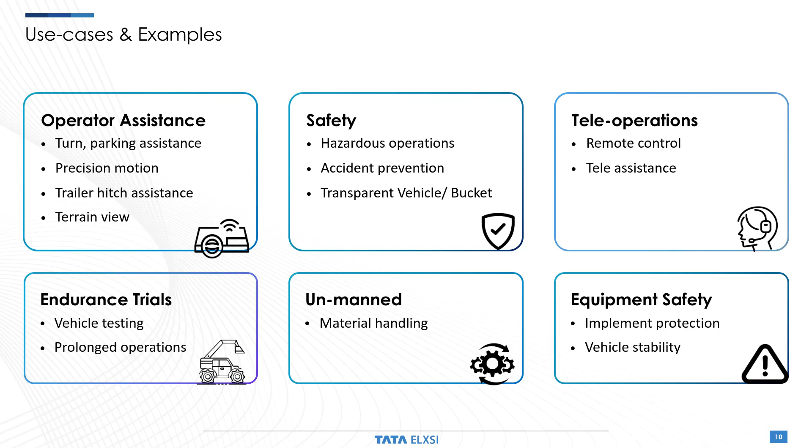Coming to the safety side, it can include hazardous operation handling, accident prevention, and transparent vehicle/bucket solutions. On the teleoperation side, it can be purely remote control for handling remote hazard operations, or tele-assistance for autonomous operation. Considering endurance trials, given driver availability constraints, automation helps run trials for 24 to 48 hours in unmanned operations. For equipment safety, solutions can address implement protection or vehicle stability.

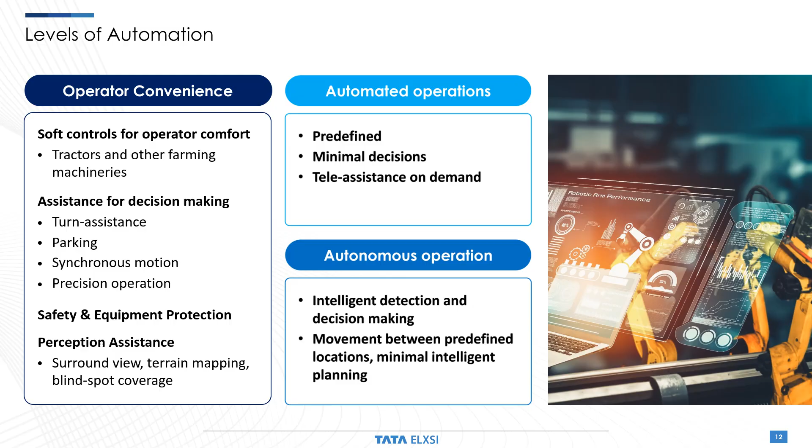Then there can be different levels of automation, starting from operator convenience to semi-automated operations, where you have partial automation implemented, to fully autonomous operations. We'll be discussing more into these different use cases in the upcoming slides.

These operator assistance solutions, the challenges associated with them can be categorized into two aspects. One aspect is the use case itself — some use cases are complex, and solving and developing algorithms for such use cases is one pillar. The other is the complexity associated with developing use cases in the development process, since hybrid algorithms are being used, which is another factor.

Let us discuss the solution challenges. When you consider the solutions, there will be diversities in the use cases, especially in the off-road segment. Comparing to the automotive segment, the off-road segment will have a lot of diversities in use cases, and that adds to the complexities. There may be requirements for precision maneuvering and extended perception, much beyond the vehicle in elevation and azimuth, and all-weather operations. Such things add complexity to the use case.

Localization and motion tracking is a huge challenge in the off-road segment, especially in unstructured environments. The dependency on multiple sensors would be required for localization and motion tracking. When coming to sensor technology, a lot of processing is required when using lidar sensors to handle degraded vision situations, and cost is also involved with the different sensors. Then the powering requirement is a challenge, especially to handle automation requirements, powering the actuators and other devices — power management is an issue.

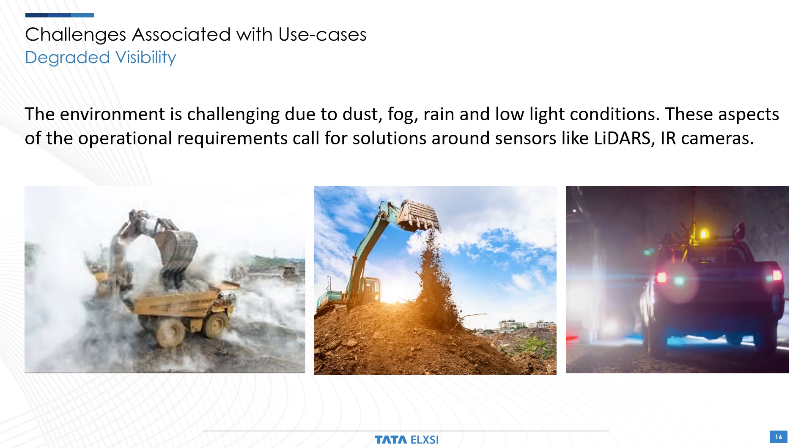Another challenge is the weather impact. Due to weather conditions, whatever sensors we are using should be rugged enough to handle that. It might require specialized rugged enclosures and a special cleaning mechanism to deploy in the field.

Another important challenge is the complexity associated with mapping and localization of unstructured environments. In most cases, since the environment is highly dynamic, it is very difficult to even represent the boundary of the drivable region. In some cases, uneven terrain and complex vehicle orientations have to be considered to develop the algorithms.

Especially for vehicles operating in mining sites and remote construction sites, the GPS signal is mostly poor. The GPS satellite signals are corrupted by data noise, multipath errors, clock errors, or atmospheric delays — that brings complexity to the localization process. Then there are errors in the odometer sensors due to wheel slip and such. All this frequently changing dynamic environment demands frequent map updates — that is the issue.

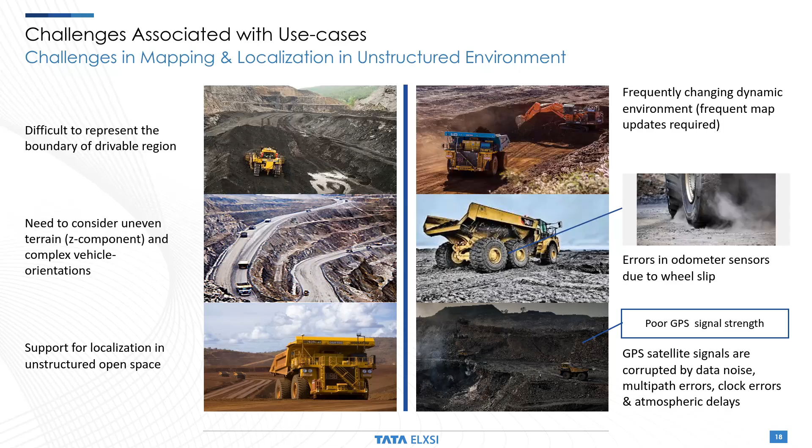Coming to the extended reach of off-road machinery like excavators and cranes, you can see it has extended reach in azimuth and elevation aspects. That adds to the complexity of the sensors, because multiple sensors would be required to address the field of view coverage, which adds to the complexity of processing as well as sensor cost and deployment.

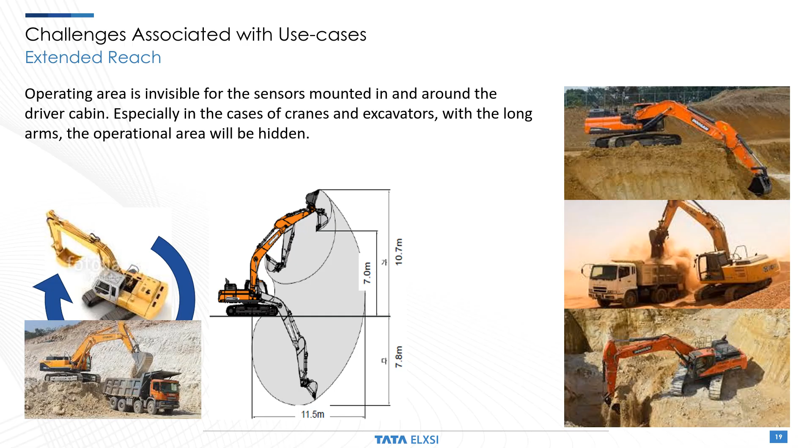As Rajesh mentioned, multiple sensors are most of the time required. Another important thing is the sensors on moving parts. You can see in the diagram, it's an excavator, and we all know its mode of operation. This vehicle has multiple moving parts.

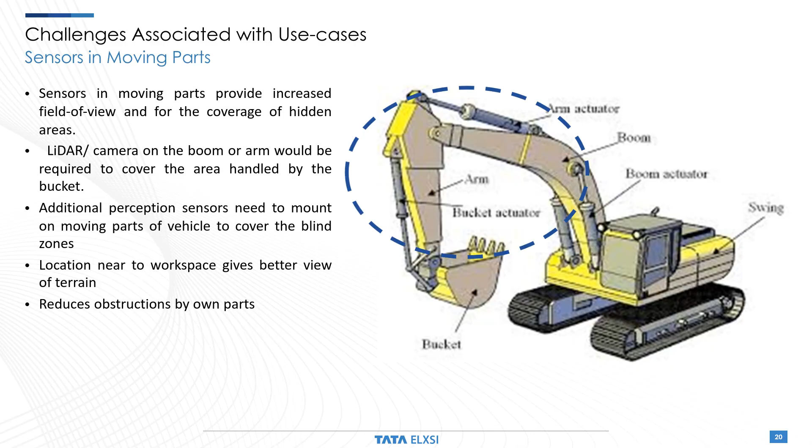The bucket, arm, and boom of the excavator are in continuous motion. In some cases we're forced to deploy sensors attached to these multiple moving parts to get complete coverage of hidden areas. A lidar or camera can be attached to the boom or arm to cover the area handled by the bucket region. These additional perception sensors mounted on moving parts cover blind spots and, in some cases, help reduce obstructions caused by the vehicle's own body parts.

There could be some usage of companion vehicles to address extended perception. A drone is one example. It can be a companion for this off-road segment, carrying additional sensors to improve perception. The challenge will be to stitch the data collected by the drone with the static sensors in the vehicle.

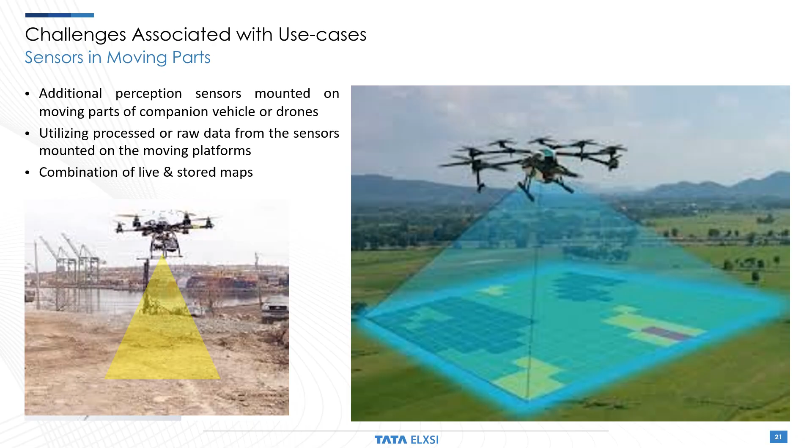As we said, we can utilize multiple sensors attached to different body parts. These body parts will be moving, and in some cases, as Rajesh mentioned, we may utilize the support of companion vehicles with sensors attached, like drones with cameras.

These things provide the terrain view of the surroundings. The relatively static images and point cloud data have to be stitched with the data from the moving boom camera. This gives us faster and more efficient algorithms, allowing us to generate a complete view of the terrain map using these approaches.

Then coming to the varying field of view, especially when sensors are mounted on moving parts of the vehicle, they have to work in tandem with the static sensors. When the sensors are moving, you'll see a varying field of view and varying resolution, and the algorithm needs to be complex enough to handle this to produce a surround view for the complete vehicle.

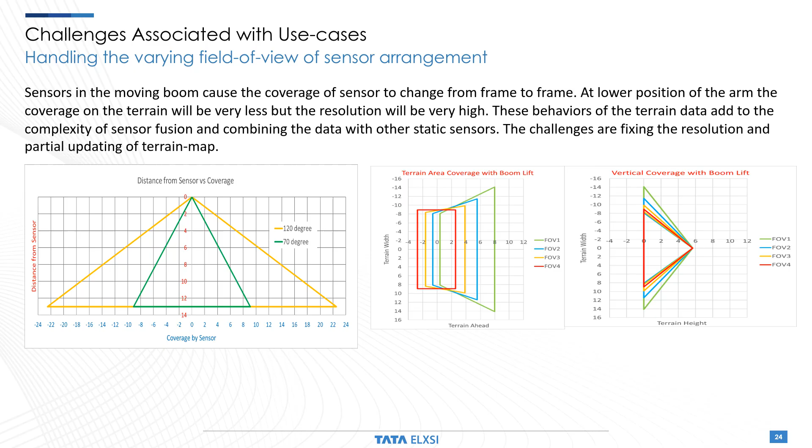This figure illustrates the varying field of view of the sensor. You can see the sensor attached to the arm portion, and each frame gives a different field of view. One important advantage is that we get complete terrain coverage, but the field of view changes from frame to frame.

At lower positions of the arm, coverage of the terrain will be very low but resolution will be very high. These behaviors of terrain data add complexity to sensor fusion, and combining this data with other sensors is also required in some cases. So the challenges are fixing the resolution and partial updating of the terrain map, since we see some overlapping data in each frame. That requires specific techniques and algorithms.

There will also be a need for extrapolation or interpolation of data, especially when sensors have different fields of view. The algorithm would require some extrapolation or interpolation, which is very challenging, especially when you want real-time extrapolation and interpolation of point cloud data.

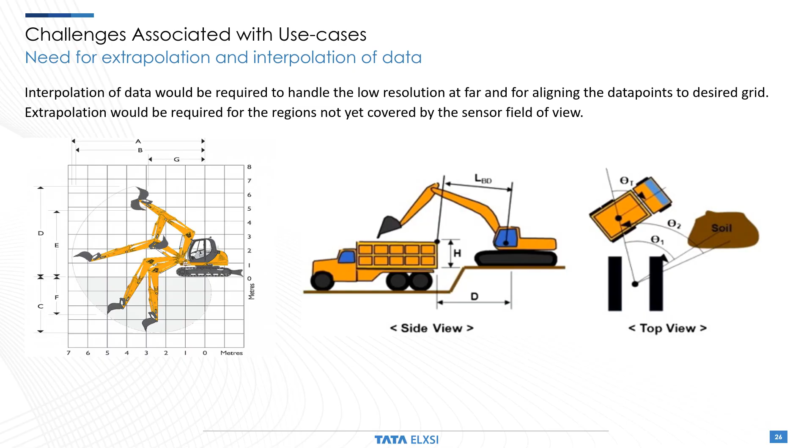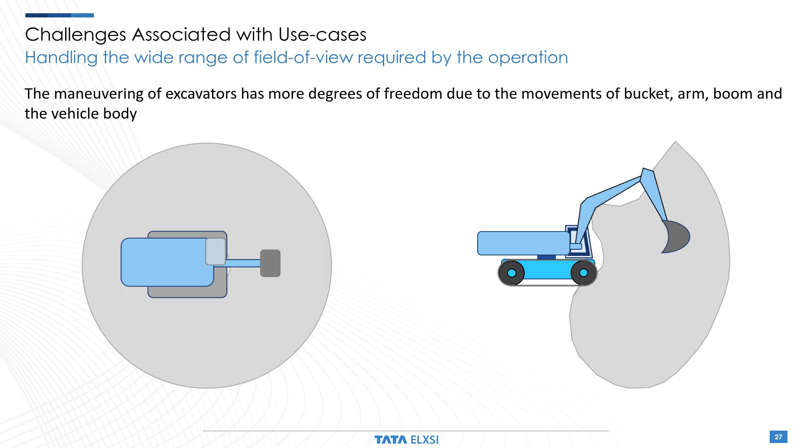As we discussed, all the things like the extended reach, range, and mode of operation of the vehicle, multiple sensors, and sometimes the sensors will be covered by the body parts. You can see in this diagram the broader FOV view of the sensor. All this maneuvering of excavators requires a huge amount of terrain data that has to be handled and processed, which brings complexities when working with resource-limited platforms. These varying fields of view and huge terrain data demand high storage and high processing platforms for handling.

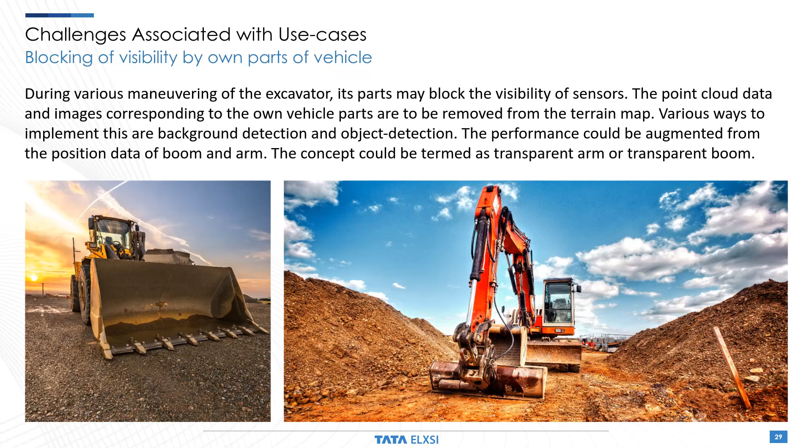Then there will be challenges associated with blind spots, especially when you have large implements like buckets for excavators and wheel loaders. There will be a lot of blind spots that can create accidents in the field. Multiple sensors would be required at different angles and structures to handle these blind spots, and again, the data processing and fusion will be a challenge.

We have discussed the challenges associated with the use cases. Now coming to the approaches, what Tata Elxsi is having to solve or develop solutions for these features. One is, of course, we can use multiple low-cost sensors, and sensor fusion algorithms can be developed to solve these issues.

Another thing is the features can be semi-automation, partial automation, or automation-on-demand kind of features we can develop to handle these use cases. And then, of course, other aspects like remote assistance and remote-controlled features with the help of infrastructure assistance, vehicle-to-vehicle and vehicle-to-infrastructure connectivity based features. We can even provide modular and customized solutions for diverse on-demand applications. These are all our approaches.

Let us consider the development challenges. These are mainly associated with data set availability, especially when you consider AI/ML solutions. The AI/ML solutions demand a lot of data sets for training the model, and getting the right scenario from the field will be a challenge, because in many cases creating the scenario may be destructive and not practical to do in the field, so data set creation is a challenge.

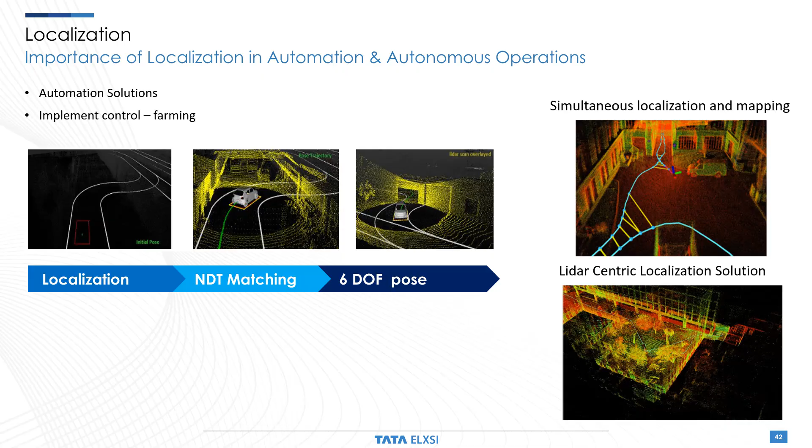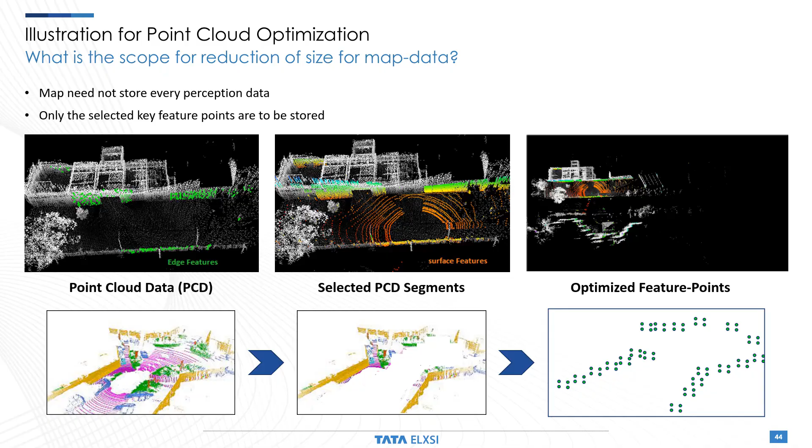As Rajesh mentioned, you can see how key feature points are reduced to create an optimized algorithm. Initially we get a rich point cloud from the lidar data, and not all these points are required to perform localization. We have feature point descriptors and intelligent feature point identifying algorithms that identify the key feature points, which are then utilized for the localization process. That's how we reduce the point cloud data, helping create optimized solutions deployable on resource-constrained platforms.

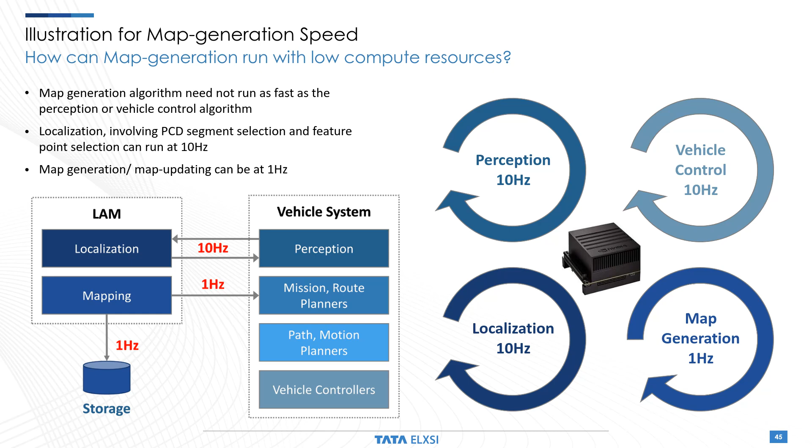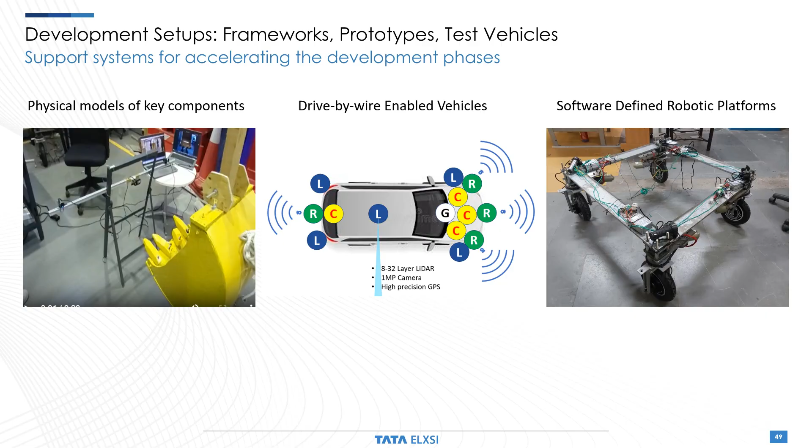Now we are coming on to a few of our work samples. On the top left is the 3D sensor-based terrain mapping and visualization feature, developed for an off-highway equipment for one of our potential customers. Data from the real field is collected, and the corresponding terrain map is generated in order to perform autonomous operations.

The one below is the high-definition map generated for one of the autonomous farm vehicles. It's a lidar-based map generation. Using this high-definition map, the rest of the vehicle operations and navigation control strategies can be defined.

The top middle one shows a perception system developed for an excavator, part of an autonomous mining and construction operation. As part of that, we have developed a 360-degree surround view system with camera and lidar solutions, involving highly complex perception and sensor fusion algorithms.

The bottom middle one is a tractor. It's an after-retrofit solution for the tractor to make it work in autonomous mode between point A and point B. It is equipped with different sensors for perception, and we have added actuators and other mechanisms for enabling the drive-by-wire feature.

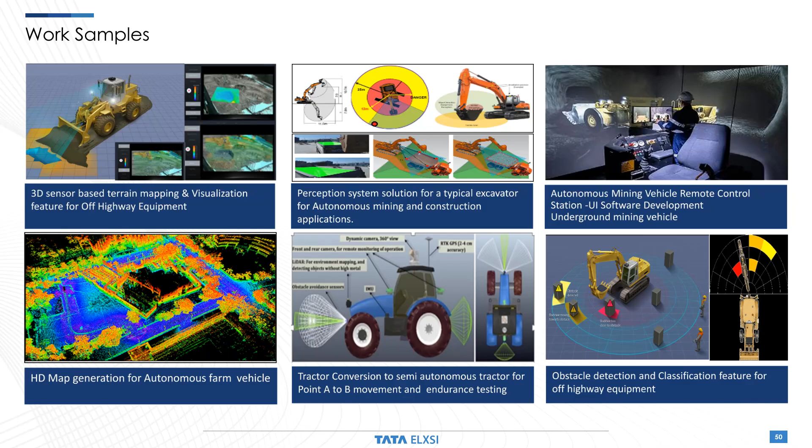On the top left is a robotaxi or passenger car platform converted into a drive-by-wire enabled feature, integrated with all sensors, which serves as the platform for our various autonomous trials and sensor validation trials.

Below that is a solution developed for a solar field monitoring system - an autonomous vehicle running within the solar field for maintenance of the solar panels.

In the middle top is the transparent bucket feature, especially for excavators in construction equipment. We understand that sensors connected to the body of the vehicle can be occluded by the movement of the bucket, so that particular region of interest data will be lost. In that case, since we have multiple sensors, that data will be utilized, the regions will be restitched, and the missing data will be predicted to create the high-definition map. We call this use case the transparent bucket. In some cases, we also have transparent boom and transparent arm use cases.

The middle bottom one is our simulation capability - an off-highway vehicle simulation tool where we can simulate the vehicle dynamics and different sensors like camera and lidar sensor models. We can even simulate the terrain and objects, and this simulation setup helps generate data for testing and validation.

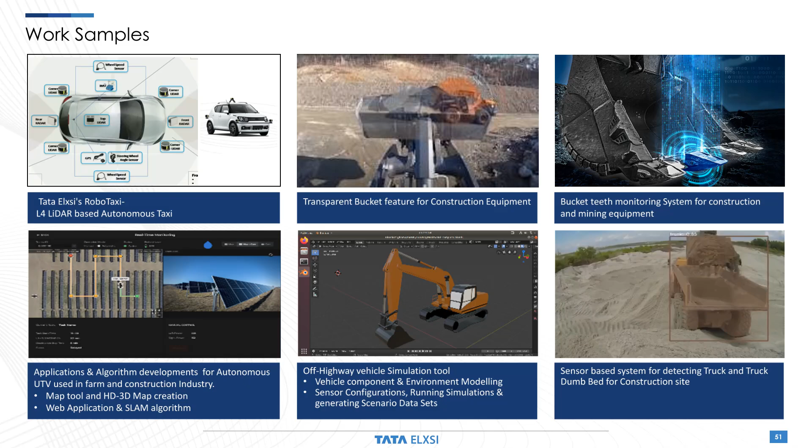In summary, we discussed all the challenges associated with the use cases, and then we saw some challenges associated with the development of such solutions, and we also discussed approaches to handle all these things. Tata Elxsi has technically well-sound solutions, especially for perception, localization, autonomous navigation of off-highway vehicles. Our main key focus is on efficient perception solutions that can utilize inferences from multiple sensors and sensor fusion algorithms, then optimized solutions that can be deployed in resource-limited platforms, which eventually help reduce the cost of the vehicle.

Then platform-centric solutions, artificial intelligence-enabled solutions for custom object detection, classification, semantic segmentation, decision-making, and more. Then intelligent localization and mapping solutions with very high precision, including camera visual odometry, visual SLAM, and lidar-centric simultaneous localization and mapping. These are technically well-sound and tested solutions, and all of them are easy to integrate and deploy in production.

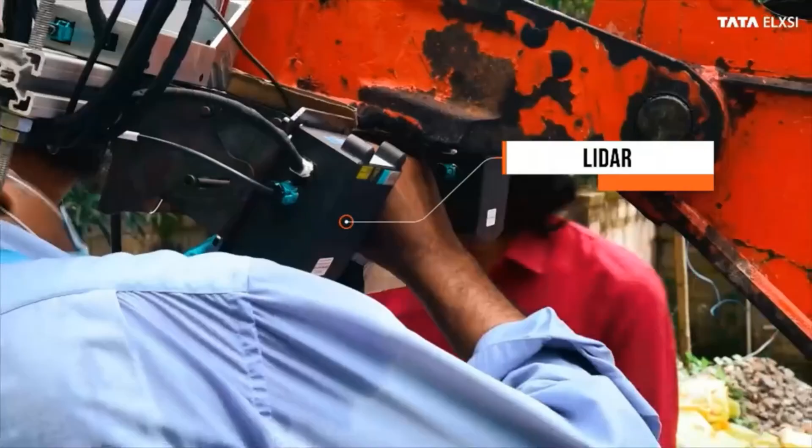With sensors like lidars, stereo camera, IMU and power distribution system, supported by fixtures, mounting rails and racks for capturing the field data. The data captured by the sensors are then used for real scenario verification of Tata Elxsi's terrain mapping and visualization algorithm. Sensor mounting positions and configurations are simulated using the tool developed by Tata Elxsi.

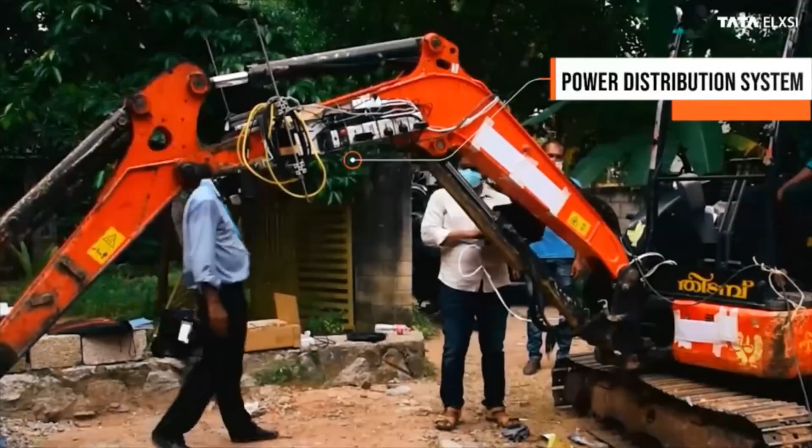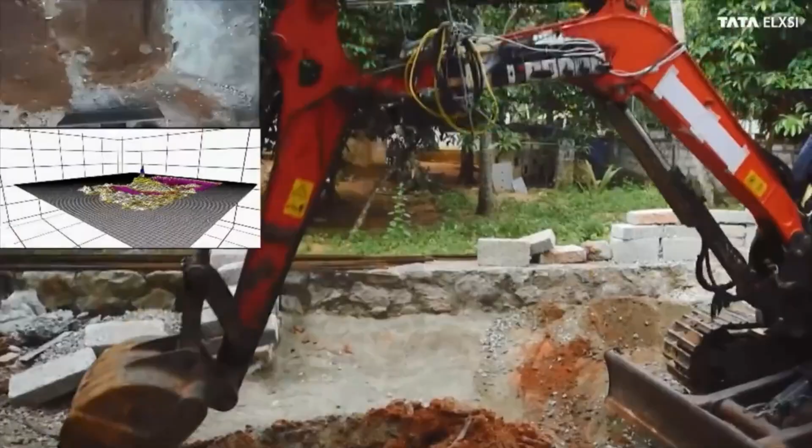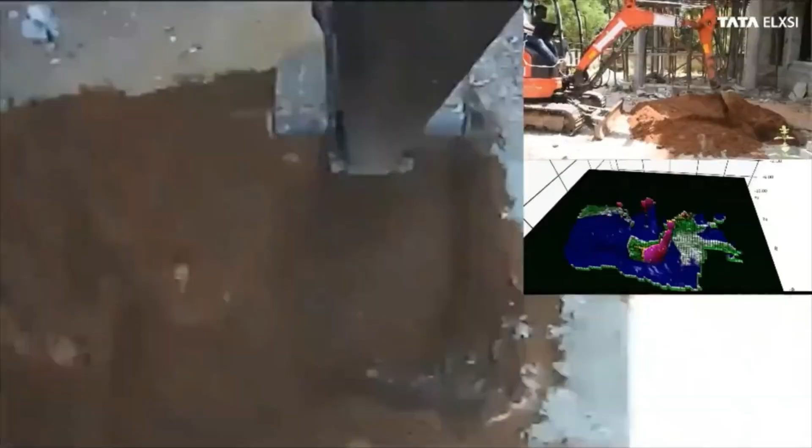The retrofitted excavator remotely gathers high-accuracy terrain and machine data from the job site to give unprecedented real-time insight and visualization of worksite progress. The terrain visualization feature uses a combination of moving and static sensors, and point cloud-based terrain mapping and visualization technology to assist the operator in decision-making.